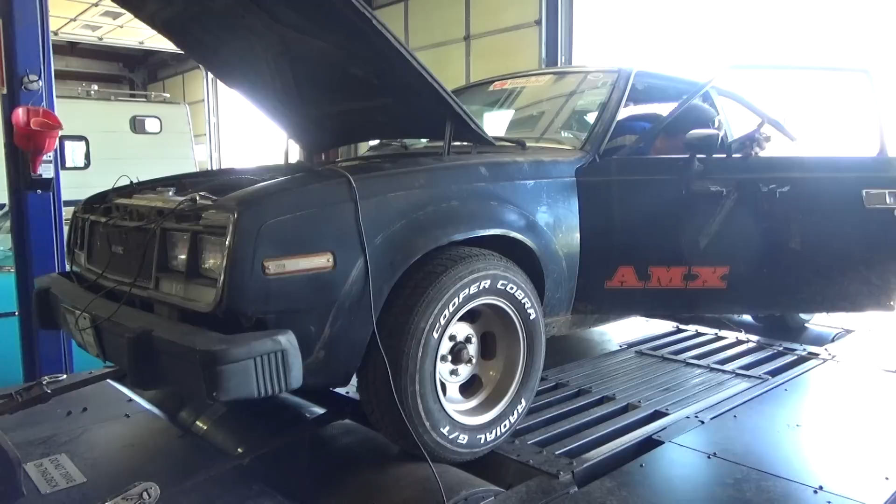Today I'm going to spend a little time on the dyno with the Austin's AMX. I want to make sure this carburetor is doing the best things it can do, and then we're going to pull this carburetor off and put a different system on it. That'll be another day. Right now I'm still trying to learn how to interpret the readings from the dyno.

Learned a lot on the Chevelle we worked on the other day, picked up an additional 40 horsepower, usable horsepower. Still got some work to probably pick up another 20 horsepower out of that with the 870 carb that's on it. But I'm not sure the customer even cares. That thing's got so much power and torque that he might actually be a little afraid of it, so he's probably going to have to get used to driving that thing now that it's making some real numbers. But it's making, what did we come up with, 370 wheel horsepower and 460 or 480 torque, something like that. Pretty respectable for an 870 carb with vacuum secondary. It really should be a mechanical secondary on that car because it's a stick shift, but it's what we had to work with, so we made it work.

That is his actual daily driver. That is his only car. So it's a good way to be retired if you ask me.

But today we're going to work on the AMX. I'm going to do a baseline pull just to see where it's at. We're going to check timing, and then, since this one is square jetted, we're going to try and go to a power valve. We'll see where it sits, make a power valve and jetting change, and see where we go from there.

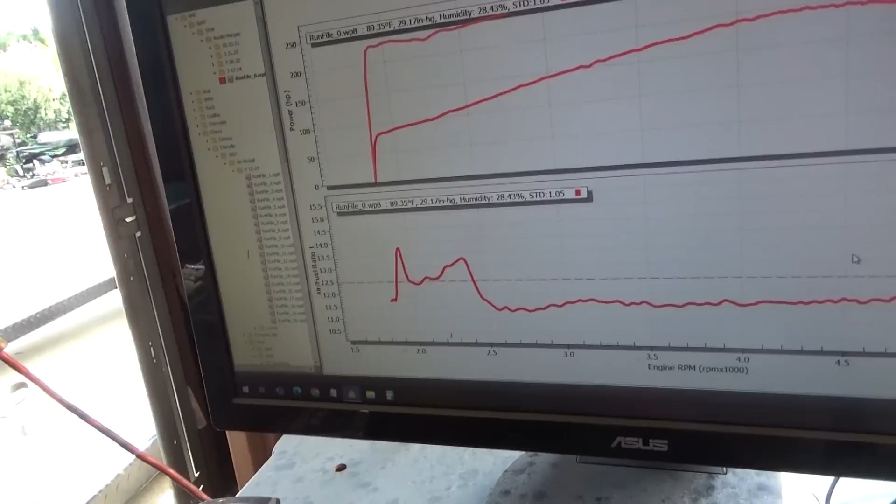Looks like we need to make a pump cam change and a squirter change. That should clean this up, and then we'll see what happens there. Looks like we're over jetted, so we're going to reduce our jets a little bit.

So we're going to make quite a few changes. I'm going to change my jets and do a power valve up front. I'm going to start with an 8.5. We'll see how that works, and see if this thing can make even better fuel efficiency with a power valve instead of being square jetted.

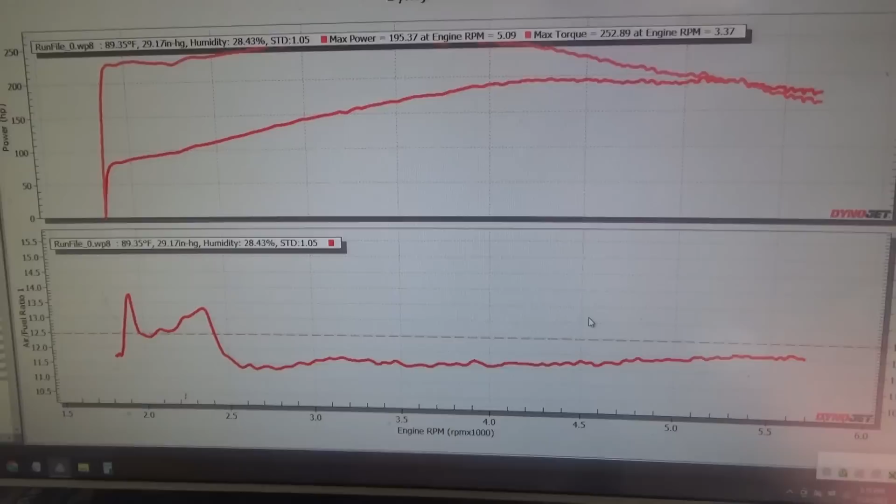It's already getting like 18 miles a gallon, which is pretty darn good. I'm going to guess we're going to get it into the low 20s once it's jetted correctly. But it's hard to keep your foot out of it when you're driving this thing around. So that's for pull number one.

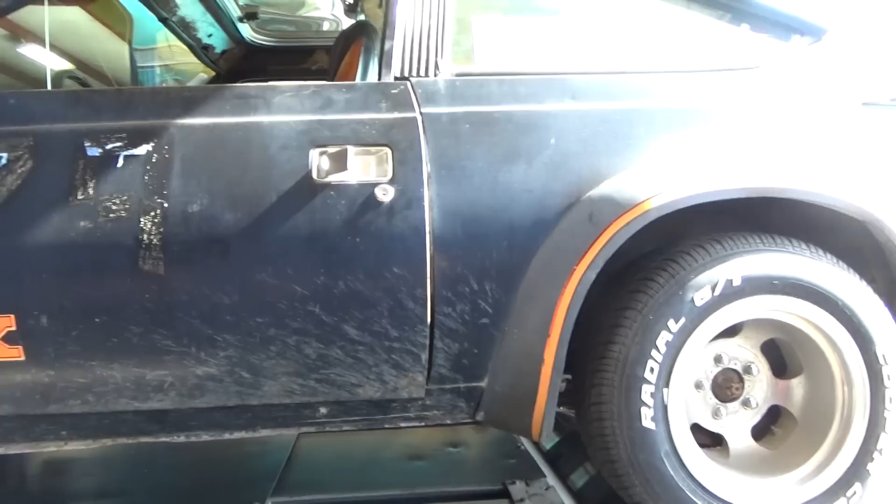Let's work on the pump cam, squirter, and... she might not be fast, but she sounds good. It may not be fast, but it's loud. Sounds fantastic. 195 at 5,000 RPM.

All right, pull number two. One change, no air cleaner. So we're just running an open carb. Let's see what that gains us.

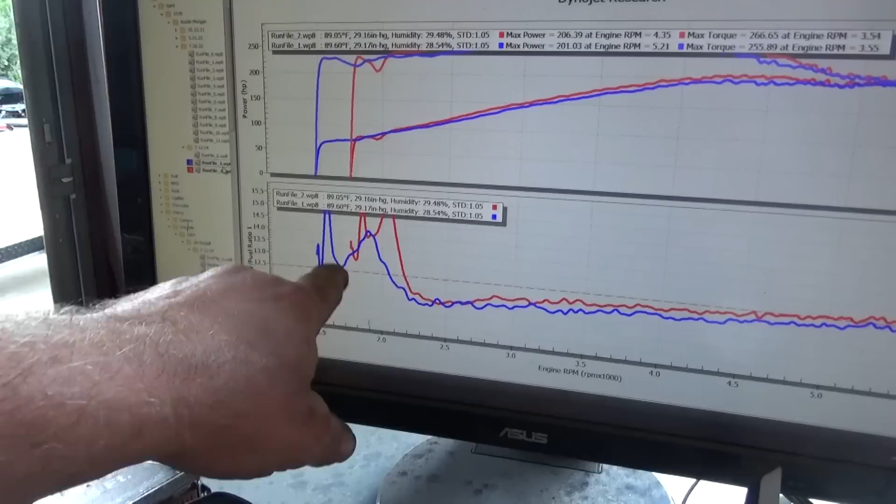Alright, so blue is my last run, red is my current run. So the blue pump cam gave us 5 horsepower and 11 foot-pounds of torque. Well, I would say that's a good improvement. My graph I'm still not liking, but we'll work on that yet. I might reduce the pump shot to see if that makes a change.

Alright, well, I'm going to go ahead and remove the carburetor, make my jet and power valve change. And this is actually a carb cheater, which we're going to remove from this car. We'll probably use it in something else. That's a pretty cool interface device built by Thunderhead289 on his channel. He talks about them quite a bit.

I think Austin did an install video on it. It's basically a controlled vacuum leak that has a Wi-Fi connection, and it lets you know exactly what's going on in your engine while you're driving down the road. It's pretty cool. But we're going to pull it off this car because this guy needs some different jetting, just because I want to make it better, or as good as I can make it. And then ultimately, this engine's going to be coming out of this car, but I wanted to make sure I had it tuned as good as I could get it with this carb, because this carb's going to probably stay with this engine in the future. So let me get the carb off there, and we'll get some of this other stuff out of the way, and we'll make some changes.

Well, Austin thought this was a square jet, but it's got a power valve in it, so let's get that off of there. Looks like we got a little dryer out there. Put a new vacuum cap on that guy, he's not doing much of anything. Looks like that guy's getting ready to go too, so we might as well replace him while we're in there.

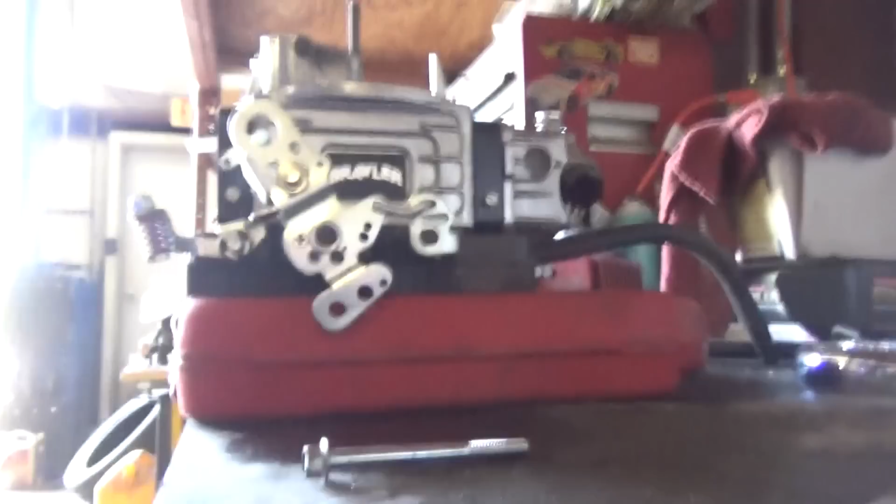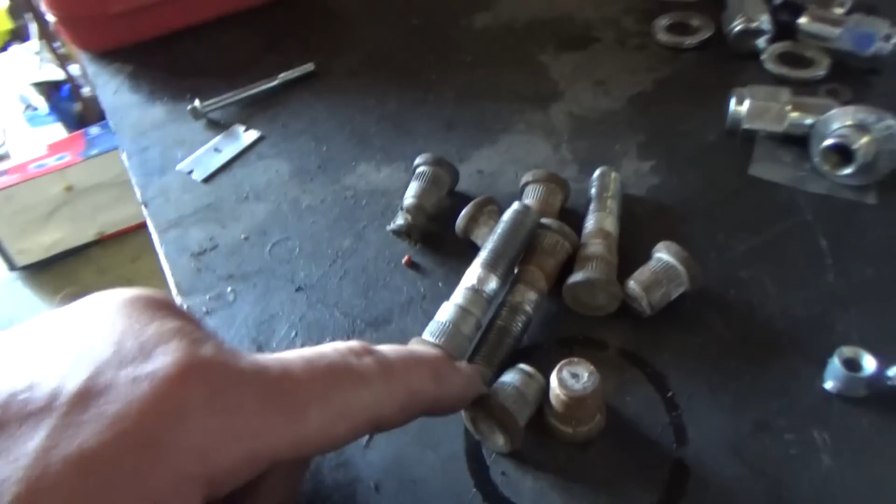Take our carb cheater spacer off of there, which is a controlled vacuum leak. Oh yeah, don't leave your lug nuts loose on your Dodge trucks. These are $16.79 a piece. Holy cow, Mopar.

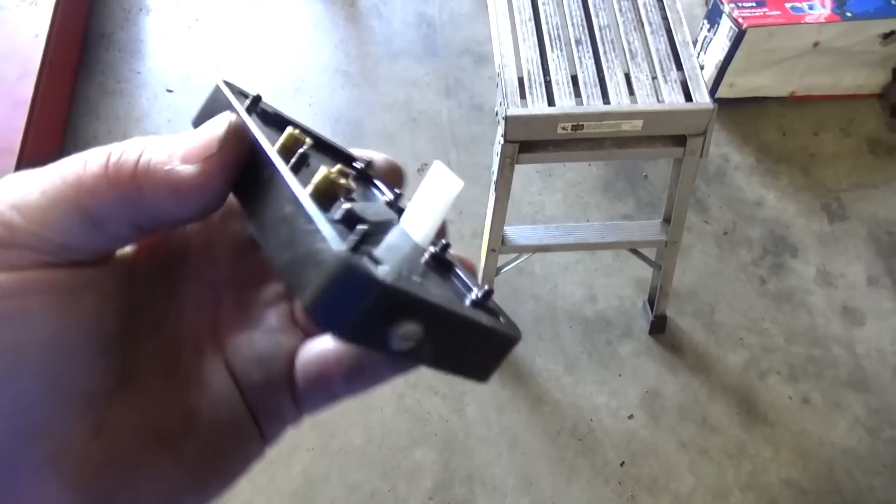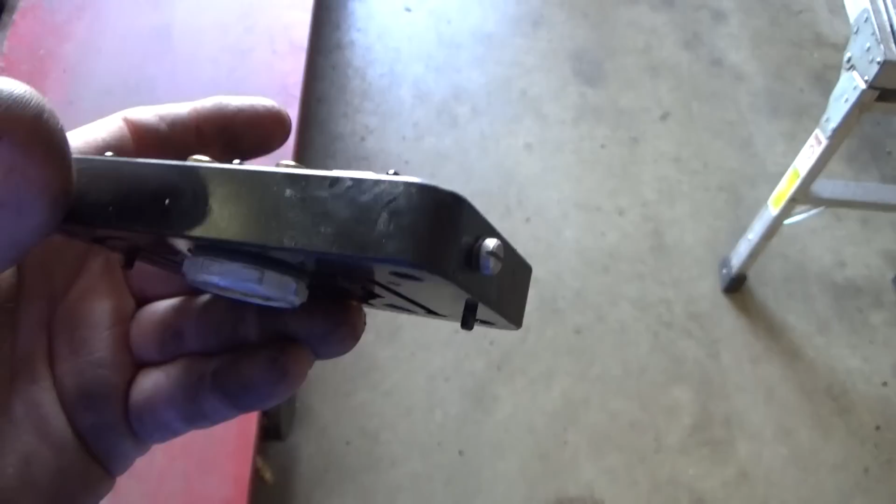So we have a 6.5 power valve. We're going to change from a 6.5 to an 8.5 and see if we get a little better enrichment sooner. What are our jet sizes? Alright, so we have 69 main jets and a 6.5 power valve. We're going to switch our power valve to an 8.5 because this car pulls 17-18 inches of vacuum cruising steady down the road in fourth gear.

So we're going to try an 8.5 to get that enrichment a little bit sooner. Hopefully that'll clean up our tip in. I'm going to leave the jets the same because at the top side it's running at a decent amount, so we'll stick with the 69 main jets. 69 is always a fun number. We'll stick with that.

I decided, I have it off the car, might as well check the back side. We have 74 mains in the back, and it's a block plate, so it's just running straight jets on the back. I'm going to put this thing back together. I didn't find any trash or debris inside the float bowls, so we're looking pretty good. I think I'm going to replace that gasket, it's looking a little decrepit. Might as well do this one on the plate too, since I'm in here.

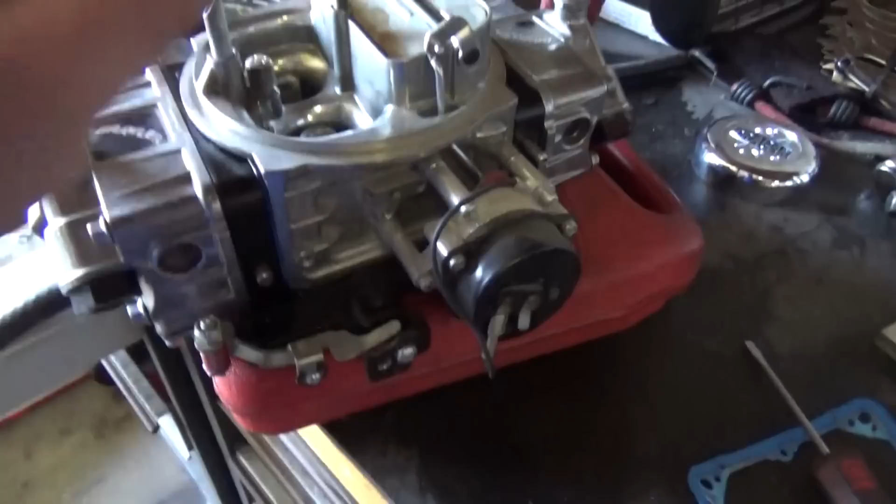My back end's all put back together with new gaskets. You can see it was pretty bad, probably over tightened a time or two, but that one's all sealed up. My pump diaphragm is acting good, it doesn't show any signs of having any problems. So I'll get my blue cam in the back side, my blue cam on the front side. We'll put this thing back down with a spacer.

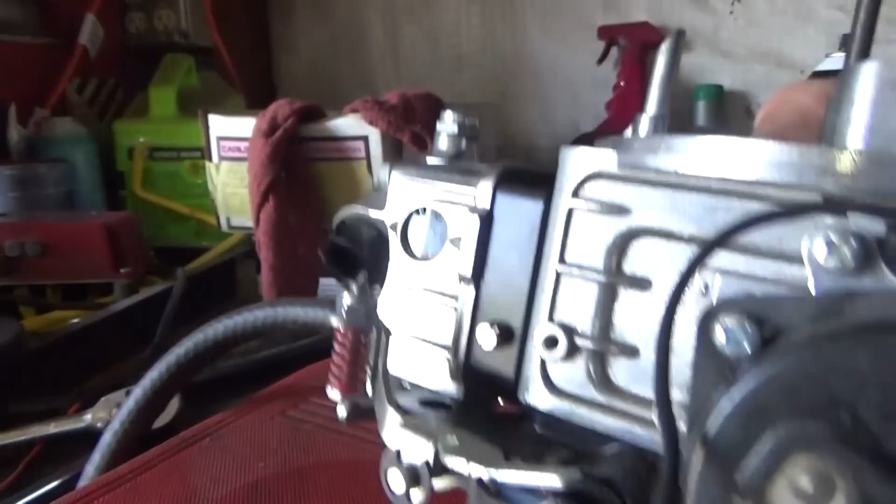Make a pull. So the blue pump cam actually is too big for the rear circuit. When it goes full wide open, I don't know how I can do this.

It's actually binding the pump. So we're not going to use a blue cam in that, that'll be bad for business. Interesting little factoid with this setup: the blue cam, the green cam, and the orange cam in the secondaries all bottom out the pump. We don't want to bottom out our pump.

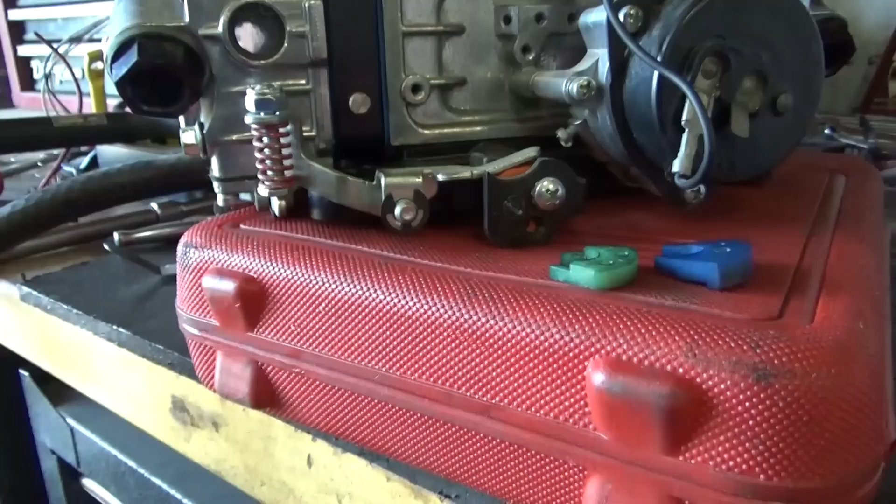We want to have at full wide open throttle, we want to be able to put a 15 thou shim in there, a feeler gauge, when it's at full extension, and none of these three allow that. So we may be sticking to the pink in the backside. We'll see. Even the pink cam binds the pump.

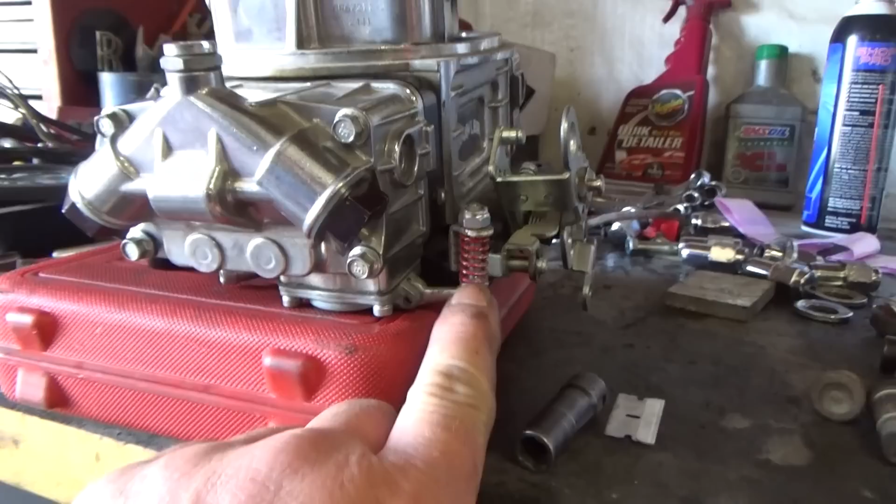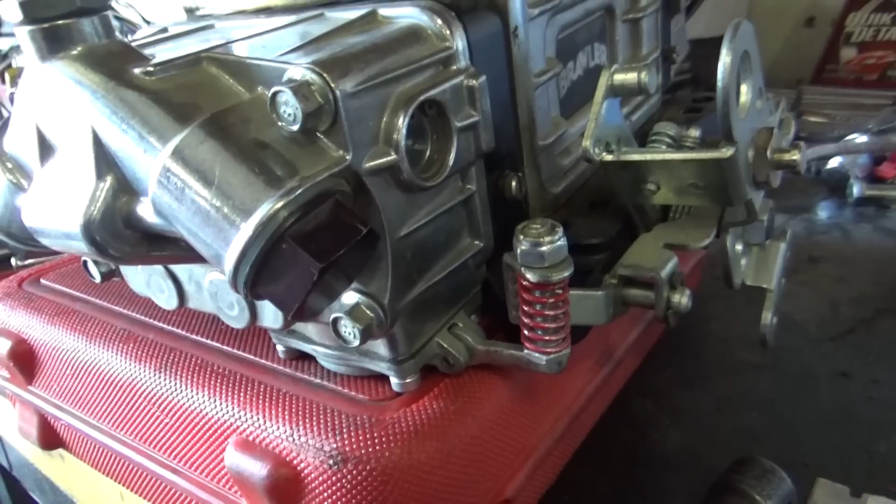That's weird. Well, I guess we're going to stick with the pink cam in the secondaries for now, and we'll figure out pump cam stuff later on that. Yeah, that's kind of awkward, because you're supposed to have a clearance here at full extension. We'll figure that out later. I've heard of people bending these arms to get better adjustment, but I wouldn't think you should have to do that. But I don't know. I don't know a lot, and that's okay. I'm learning as I go. Oh yeah, I'm a dummy.

You shorten this guy up, that'll change your depth and allow you to clearance that for the bigger cam. So let's put our blue cam back here. We'll adjust our linkage spring bolt so that we have clearance at full extension. That way we won't have our bind and we'll have more fuel pump. So let's go back to a blue cam instead of me fiddle farting around with stuff, because I'm still learning.

Alright, so I have my blue cam in position 1 on my secondaries, and I'm going to tighten up my linkage adjuster, and we'll see where that ends up being. It's going to be, you can see it's actually loose right now. Let's tighten that guy up.

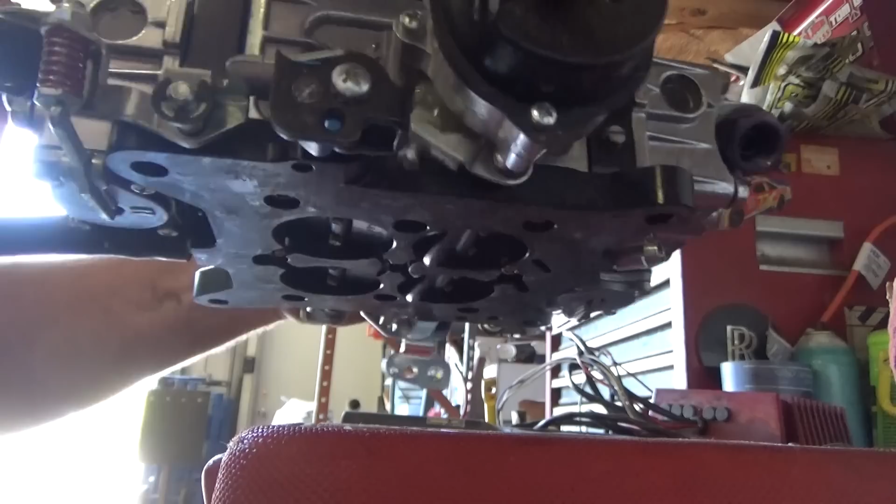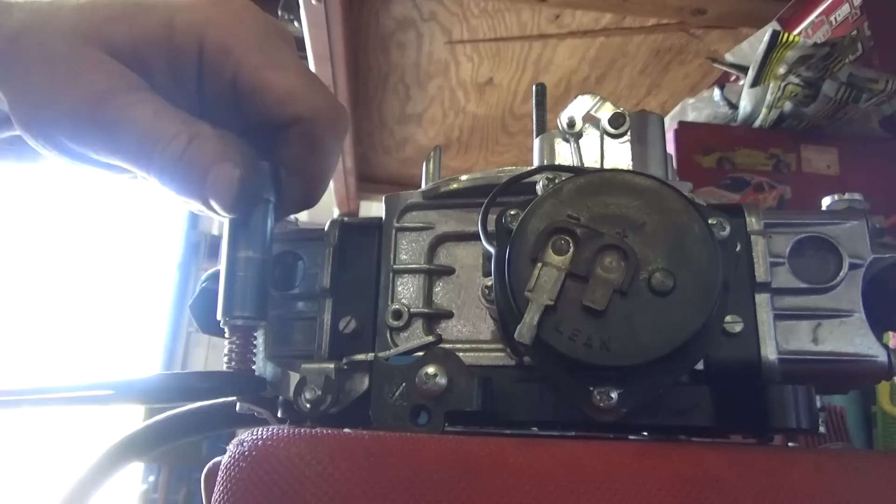Still too tight, I think. Yep. Tighten that guy up a little more. Better. There we go. Now we're not binding. Good deal.

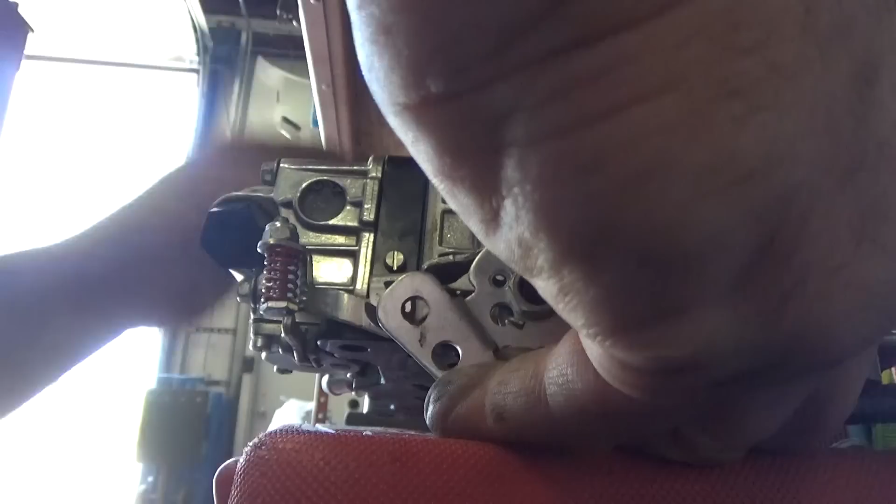So I'm expecting to see an improvement with fuel rate at the tip-in area and the early RPM stuff. I raised my power valve. Let's put this thing back on the car and see what it does. Made some good improvements. I finally understand the adjustment process on the linkages, because at full open throttle you want to have 15 thousandths shim be able to pass through there so you're not bottomed out, because it creates binding on the linkages, and it can cause accelerated wear to different bits. So let's put this thing back on. I've got blue cams front and rear. And everything looks to be good.

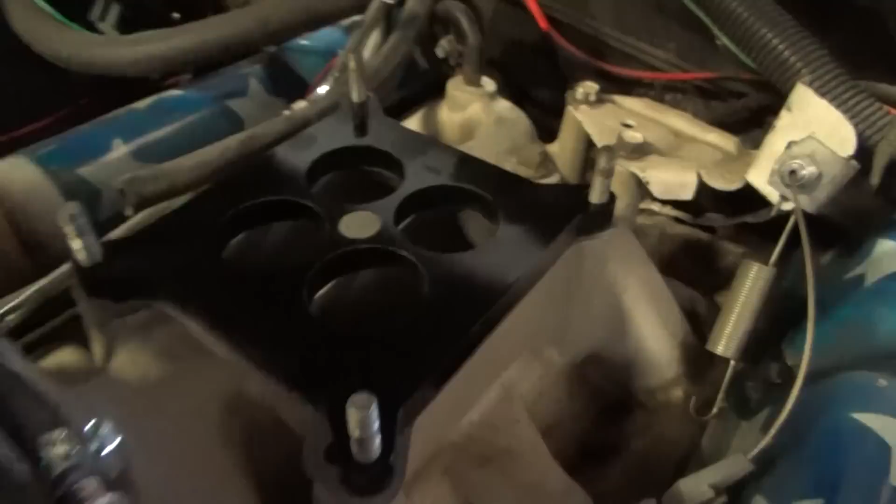Alright, so we're going to use a Jegs phenolic carburetor spacer. This one's a 4-hole, just like the Carb Cheater one that we had on here. Comes with bolts, 2 gaskets, hardware, pretty nice little kit. The gaskets fit well. Get rid of this old one, in a box, and we'll save those for later. Drop a carb back down, hook everything up. I gotta go find some vacuum caps, and we should be in business.

Turn my idle speed down here. That'll work. I think a better built system's in this car's near future. Except those are expensive. Sounds pretty good, I like it.

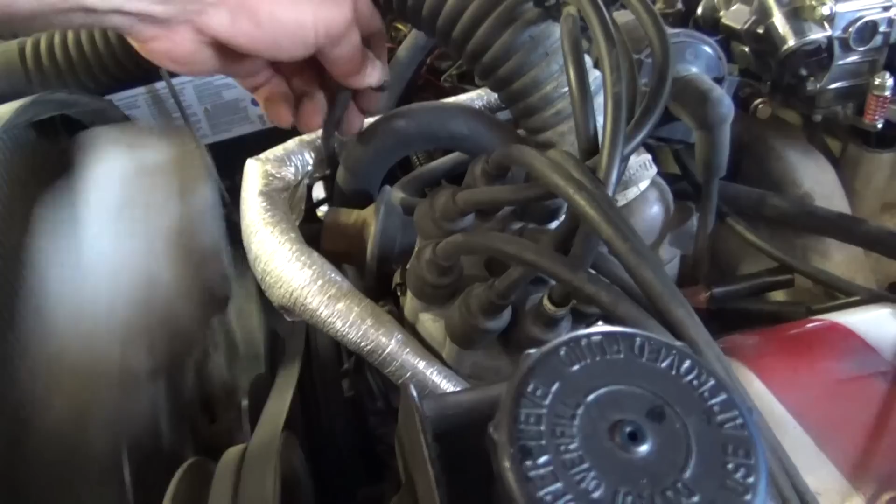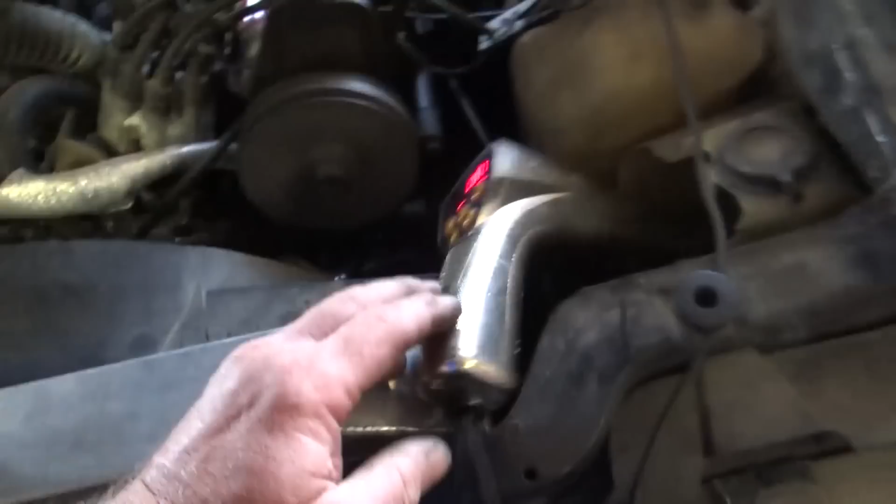Let's plug up my vacuum, see where our timing is since that's disconnected. Looks like we are a little lazy. We need to give it some more timing. So let's make a pull with the timing where it's at, and then we'll make a pull with the timing advanced another probably 8 degrees to get it where it needs to be.

Man, that sounds good. All right, what do we got?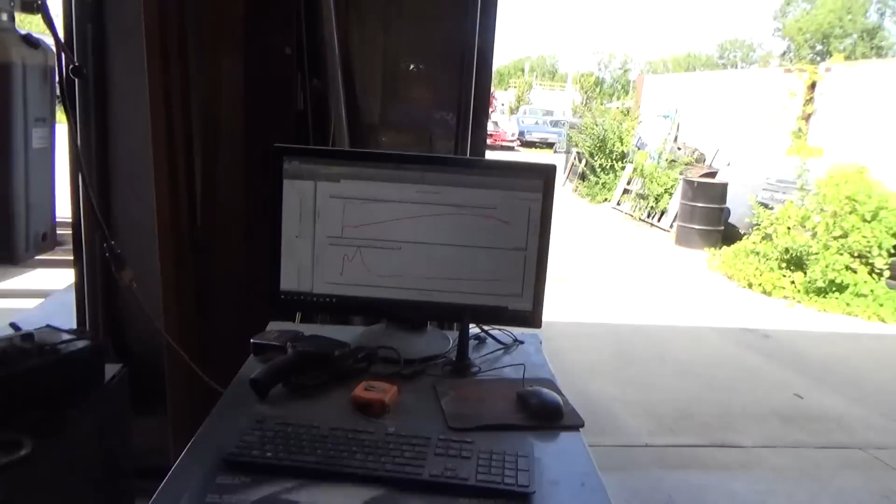210 at 4,490, and 269 torque at 3,180 RPM. Well, that's pretty cool.

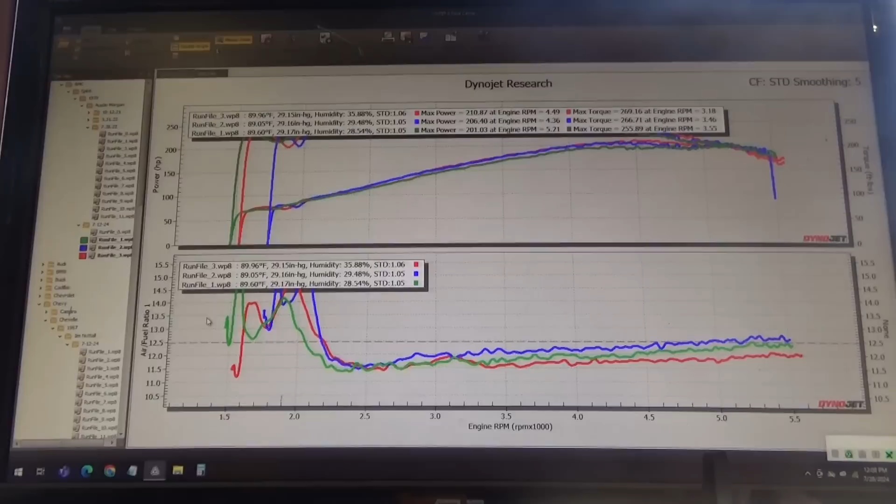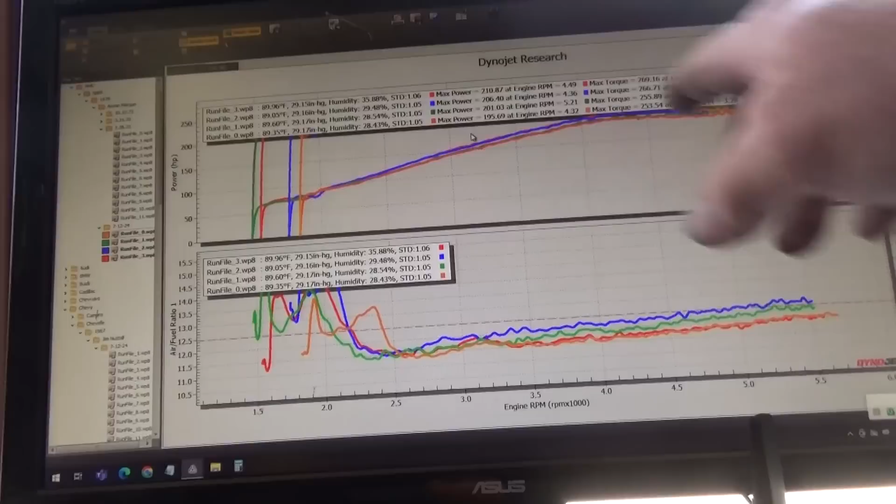We've made almost a 5 horsepower improvement each run on the last 4 runs. That's pretty awesome. 195, 201, 206, 210 at the wheels. I'm pretty happy with that.

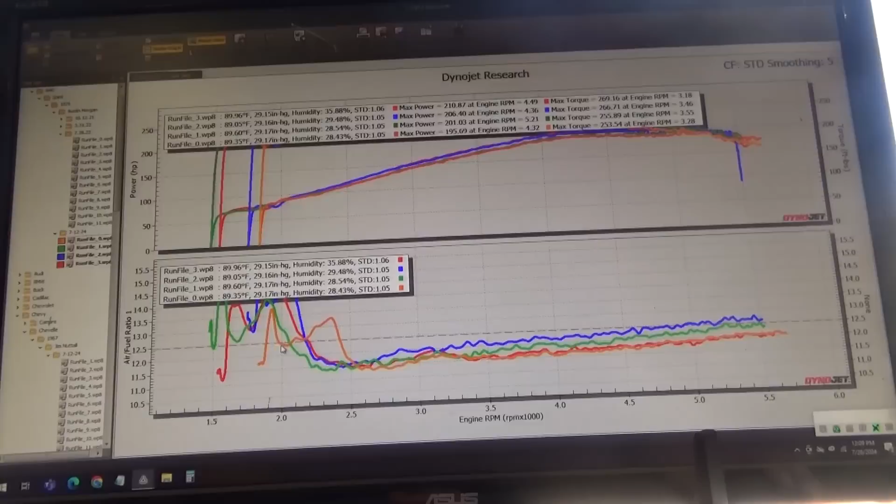So I'm actually going rich now initially, and then it leans out, and then probably the secondaries are going in and leaning out. So let's reduce our shooters and see what kind of a change that makes. But yeah, it's a good change, nice linear power too.

Alright, I'm going to make another pull real quick. I adjusted my shooter size down. It was a 32 in the rear, I went down to a 28. And it was a 31 in the front, which I also went down to a 28. We'll see if that makes any changes.

I want to see that high-low kind of come closer together, and I think that's where it's going to come into play. I mean, we're not doing bad. 210 to the wheels on a 307, that's pretty respectable. That's got to be, what, probably 250, 260 at the crank, somewhere around there.

I don't know, maybe more than that. I don't know what the driveline loss is on this car. I would say 20% is probably a good guess. Let's fire it up and see if we made it better or worse.

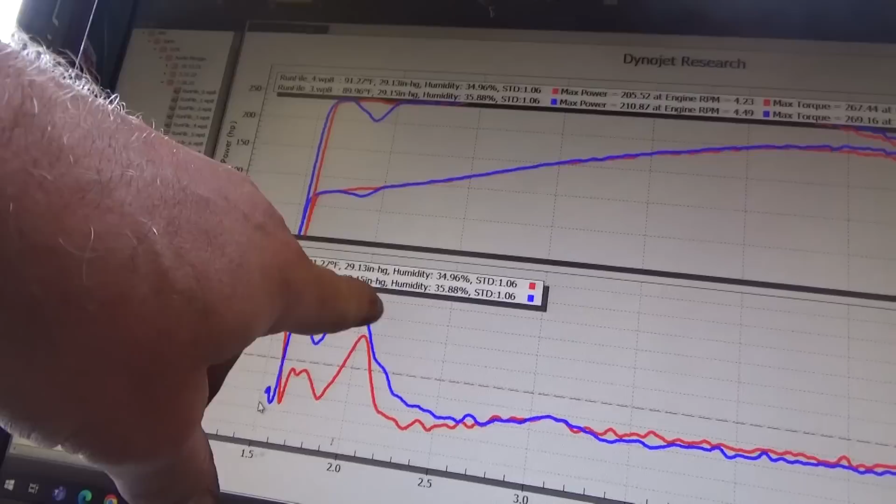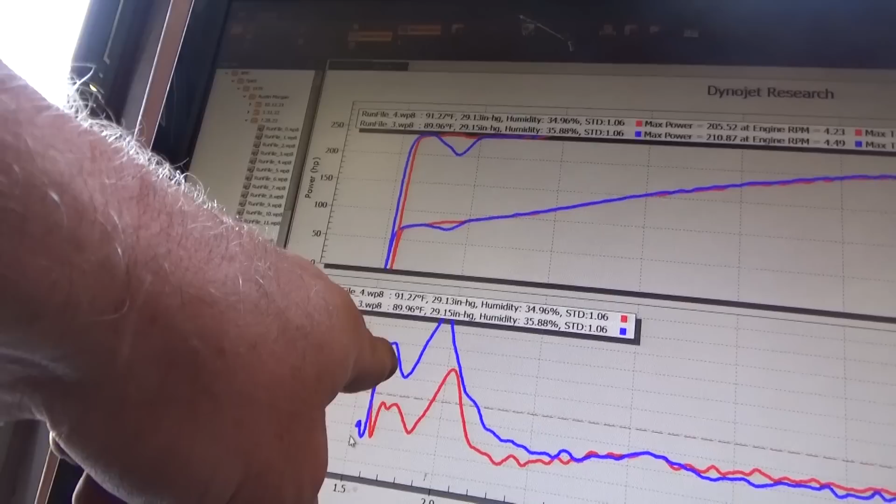I haven't quite figured out what part of the circuitry is doing that. That might be the secondary pump shot, because I moved them both smaller, which brought me more rich, both in the initial tip-in and then the secondary tip-in, which is what I'm guessing that is.

And then we go down pretty fat, and then we end up, so we could probably take some jet out of this now that we're coming into it where we need to be, and taking jet out of it will raise our horsepower across the band. So I may go one jet size smaller on the primaries and see what that does.

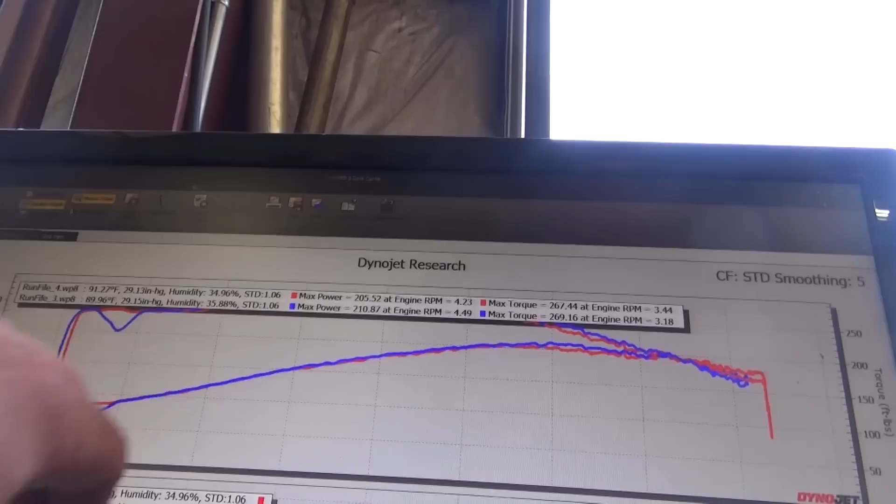Looking pretty good. We only lost 2 foot-pounds of torque, but we lost 5 horsepower. But we're in a much safer range, only getting up to 13.5, so that would be safe for streeting.

But we'll definitely take some jet out of it. Or do you take the jet out of the secondaries? That's a question. I suppose I could just run it on the primaries.

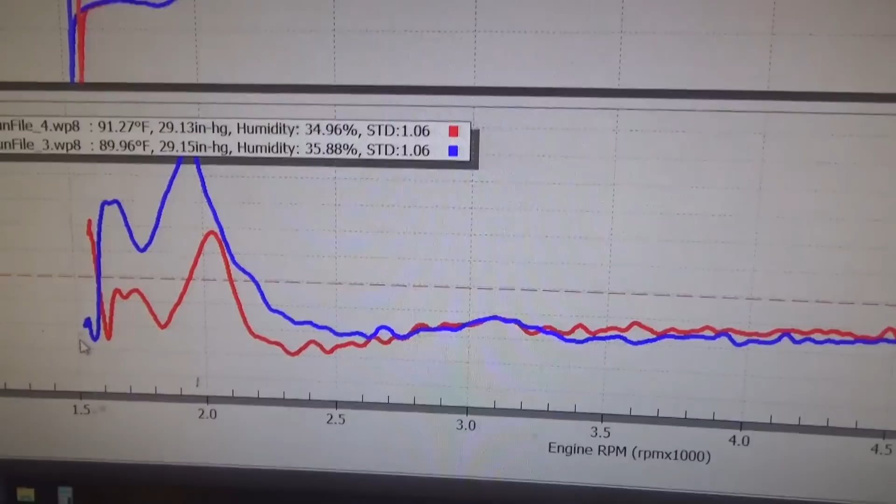This is a progressive mechanical secondary. I don't know how I'd do that. Disconnect the linkage and hold the primaries shut, tune the primaries till they're where I want them, and then add the secondaries to it. That's probably how you want to do that.

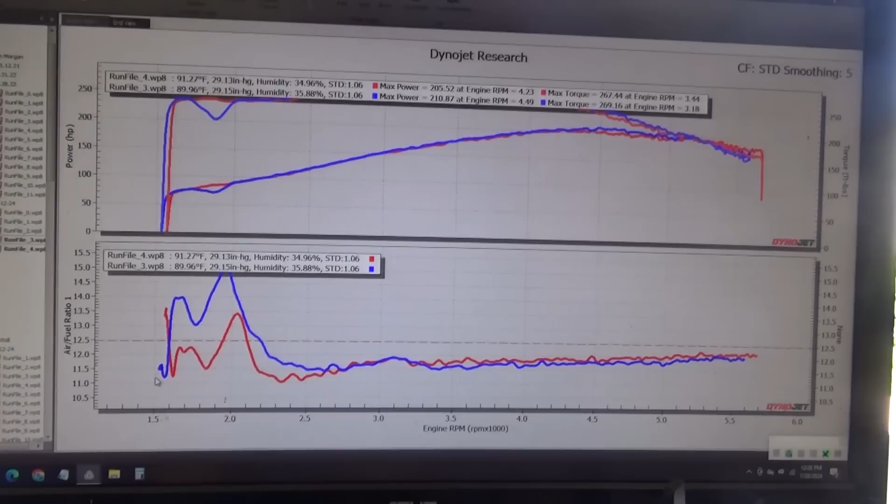But we're making improvements, I like it. So, secondary shooter change on the secondaries only, from a 28 to a 25. Make that shot last longer. Hopefully it'll take some of that second peak out, and that'll verify that that second peak is the secondary transition.

All the way across the board, I'm pretty happy with it. After that, I'm going to add some timing back into it. Let's make this run with the secondary shooter change.

And it did drop that secondary spot, so the shooter change was beneficial. Lost power again, but we're running fatter all the way across the board, so we need to take some jet out of it. I'm going to drop the mains one tick, see what that gains us. We're probably going to go down 2 on the secondaries.

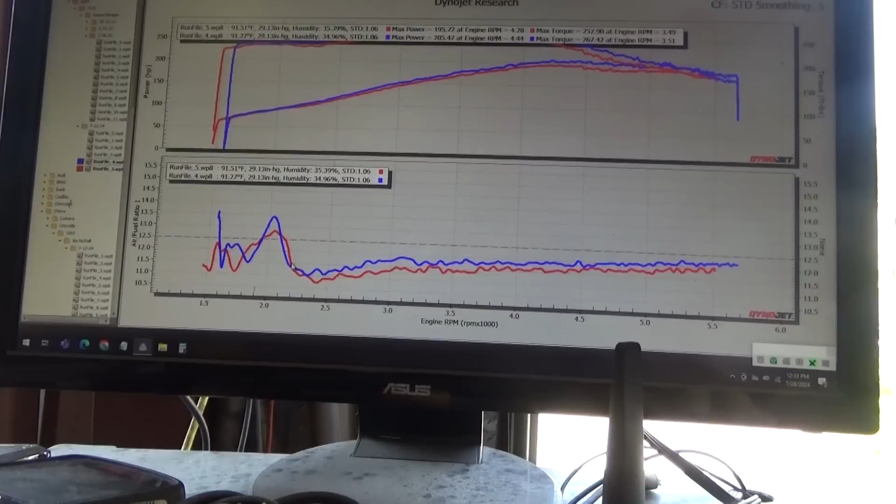You can see the change, only changing the pump shooter made. That graph's basically the same, but then the peak, the secondary peak is less. So, pretty good. Let me add some timing into it, because our timing is not really great.

Alright, we increased our timing. It was pretty lazy, so I just added probably 8 degrees of timing to it. So we should see a nice gain from that.

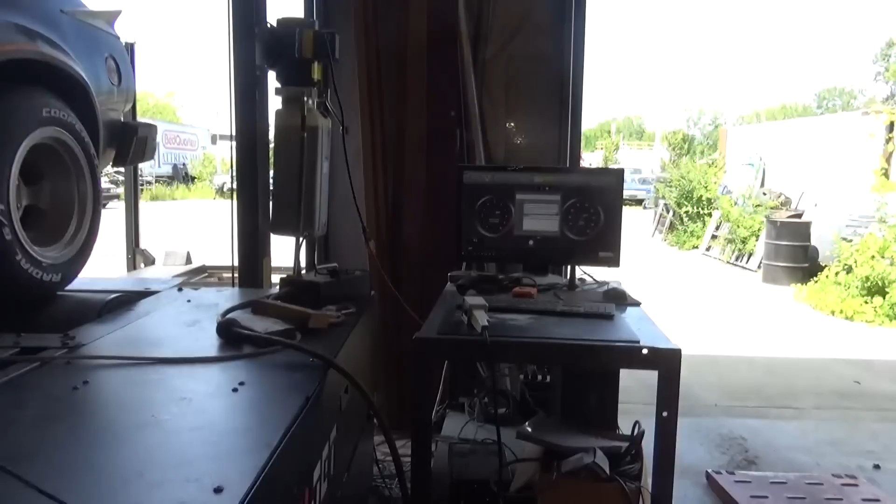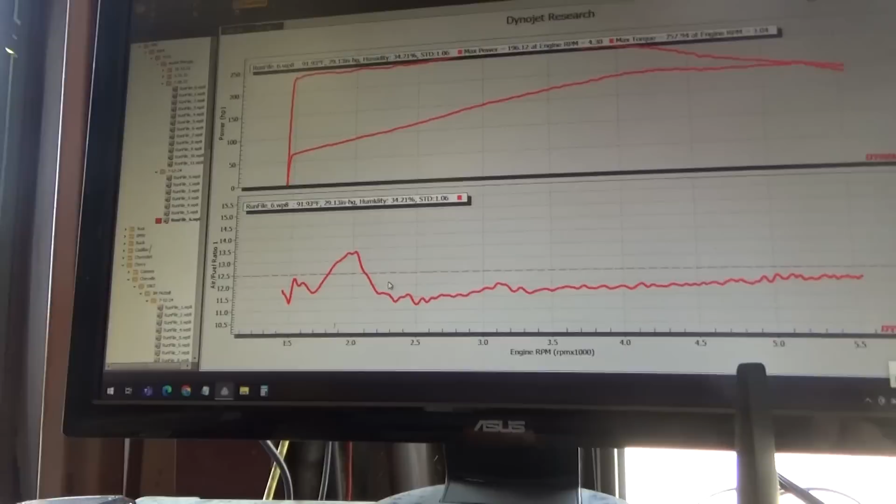Save. Oh, lost more power. It's also getting hotter. 196. What'd you do, Richard? We'll take some main out of it. You made it worse. But I also made it safer. Let's see.

That's pretty. We can definitely bring that up quite a bit with a jet change. So that'll be next. I'm gonna let this car cool down. I'll probably pull the carb off again to do the jets on the front. It's kind of tight in there on this car. Nothing's dripping out the bottom. That's pretty good for an AMX, or any AMC for that matter.

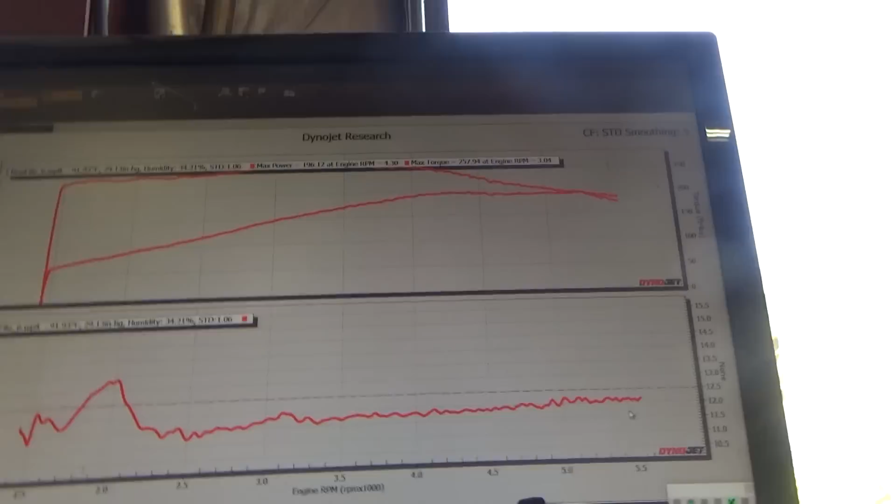Well, I've made headway. The last 3 changes I made actually reduced my overall horsepower. But my torque stayed pretty close. So I dropped from 269.16 torque at 3180 to 258 at 3060. I went down from 210 at 4490 to 196 at 4300.

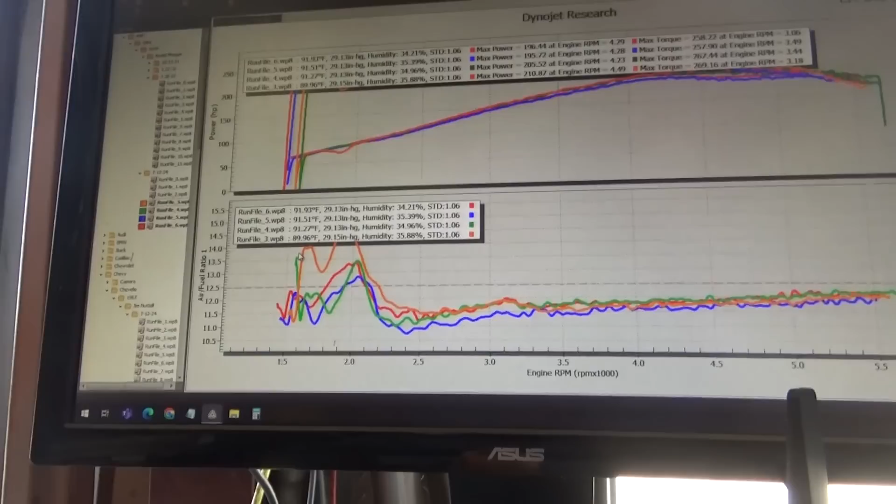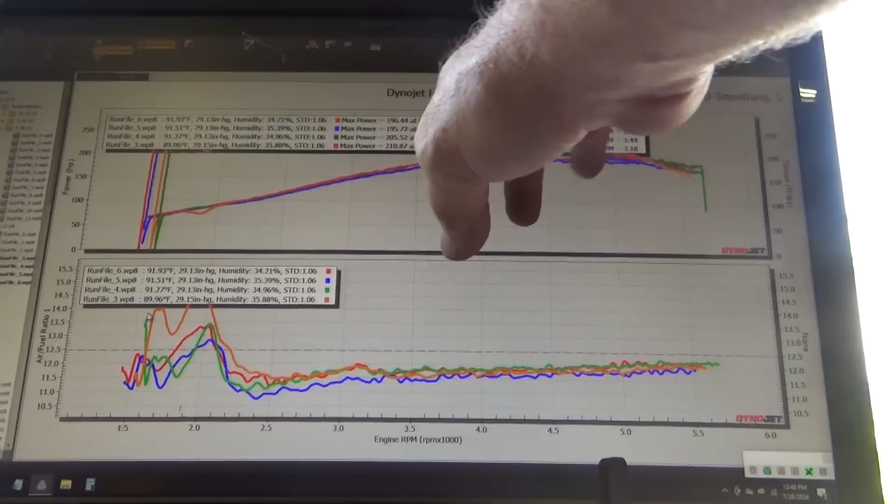But you can see I'm way better in my tip ins, and this is so subtle I don't think it's anything to worry about. So now I'll focus on my mains, bring those down a little bit to lean it out, and we should see the horsepower and torque probably rise a bit because it'll be running cleaner, especially in this spot. So that'll be next. We may try some different pump cams too, but the blue one's working pretty good.

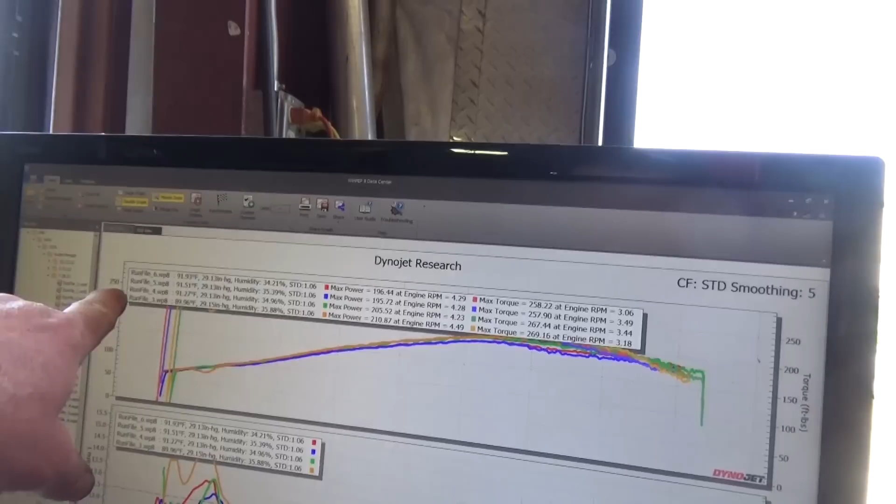Well, like I said, I'm going to let this thing cool down. I'll pull the carb off. I'm going to go down 2 jet sizes in the front, and then we'll fire it up and see what it does. We might take some of that timing back out of it too, because it lost quite a bit with that advance. So, like 5 horsepower. Oh no. Actually, the timing advance gained us a horsepower and a foot-pound of torque. So it basically didn't do anything.

Alright, well, I messed around with some other stuff in the shop while this thing cooled down. I dropped the primary main jets from 69s to 67s. It should bring our AFRs up across the board. And we'll see where that is. This will be the last pull for today, probably the last pull for this video.

I have to take the O2 sensor out of the exhaust, and then the rest of the carb cheater can be put in a box for its next destination. I'm not sure what that's going to be. And then I'll pull this thing off the rack and move it down the line. I actually might get my Buick down here and play with it a little bit on the dyno. It's got some room for improvement on it as well. So let's get this thing up to temperature, get the carb bowls filled up with fuel, make a pull.

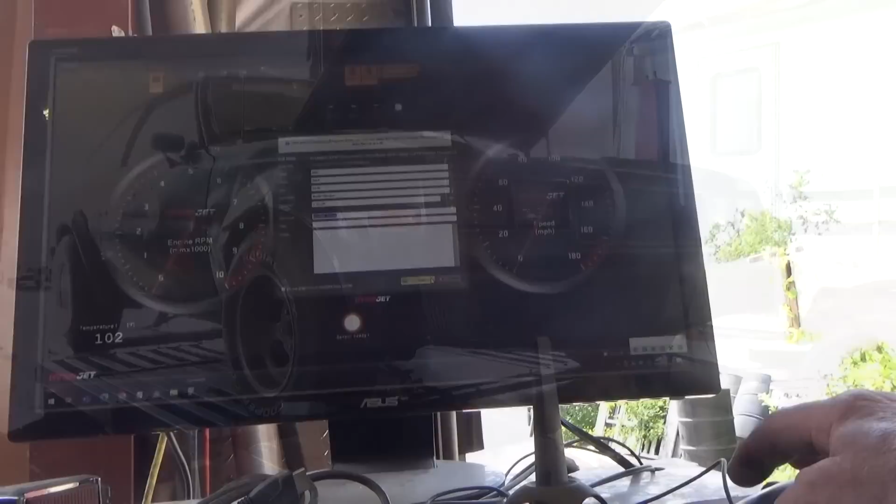Save. Ooh, that's a lot more lean. That was a huge lean pop, yep. Lean stumble. Wow, that was up to 16 to 1. And we get down to, we're still below 12.5 for the second half of it. So maybe go up one jet.

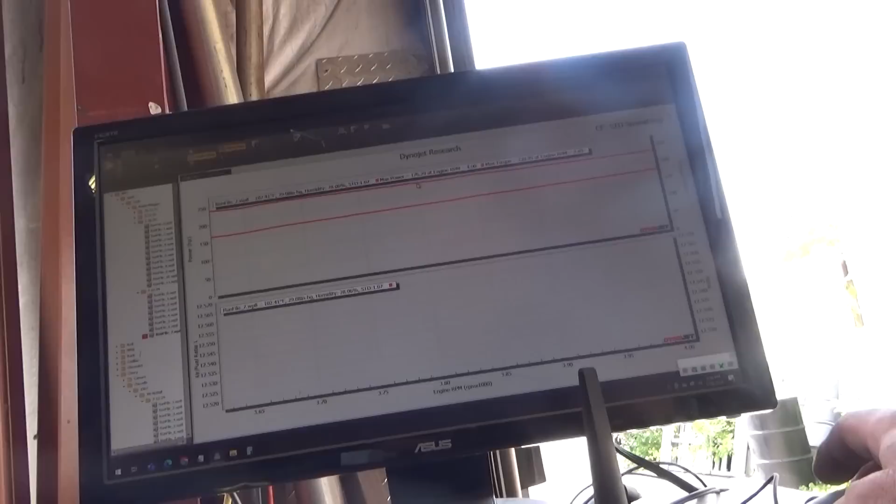Oh, I lost a ton of power. 176 and 238, so I'm definitely going to put more jet back into it. Let's make another pull just to compare the same to the same. What did I do? Oh my goodness. Let's make another pull just to compare apples to apples.

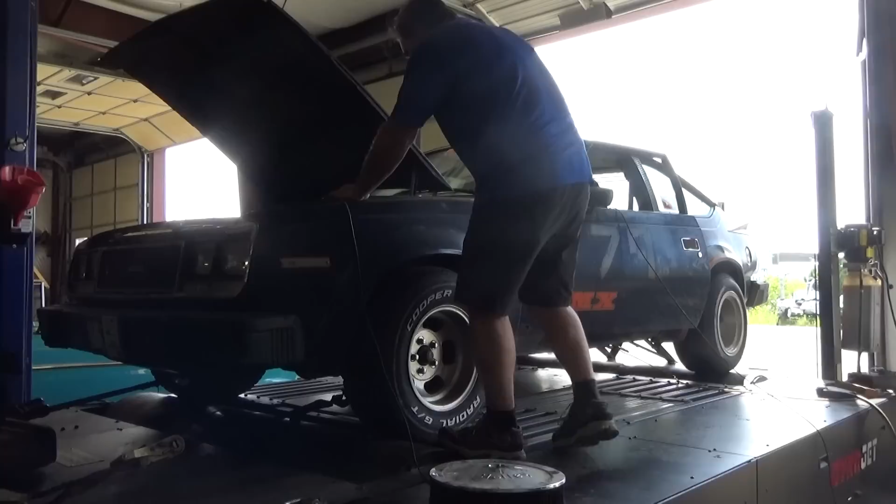Secondaries are definitely not opening all the way. Ouch! That explains a lot. His throttle cable's turned into a slinky. Need a solid casing sleeve. The casing of the throttle cable is collapsing on itself, so now we have slack in the throttle. So I'll find a new sleeve, ouch, hot, a new sleeve for the throttle cable, but that's not going to happen today. So to be continued, I guess.

I'm going to fix the throttle cable. I'm just going to make a new casing for my throttle cable. This stuff is actually a steel core with a thicker cable, and you can see the old one got all heat disfigured, and so the casing was actually shrinking and not allowing the carburetor to open.

So hopefully we'll see a substantial change in our output now that we have proper full opening of our throttle cable and our throttle actuator. So without further ado, let's warm this thing up and see what it does. Float level needs to come up a hair.

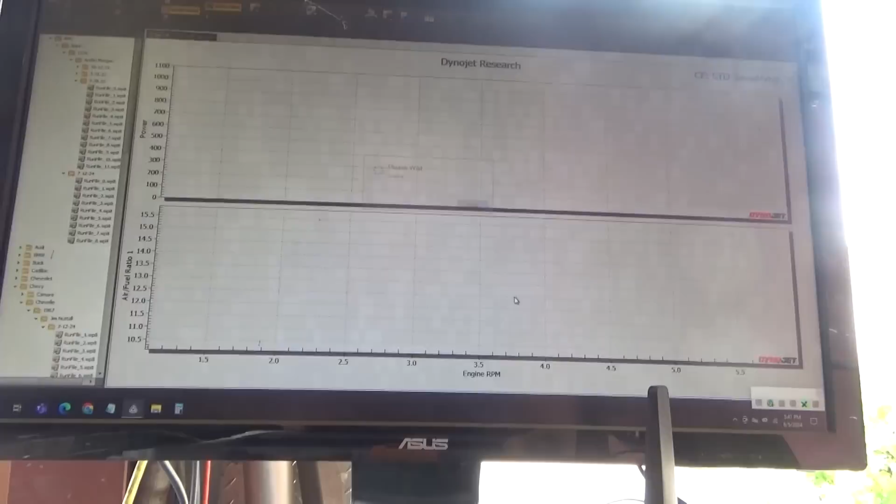Little lean tip in. So I need more pump shot. 224.47 at 4,600. 281.87 torque at 3,400. Well, it works a lot better when the carburetor's opening all the way, doesn't it?

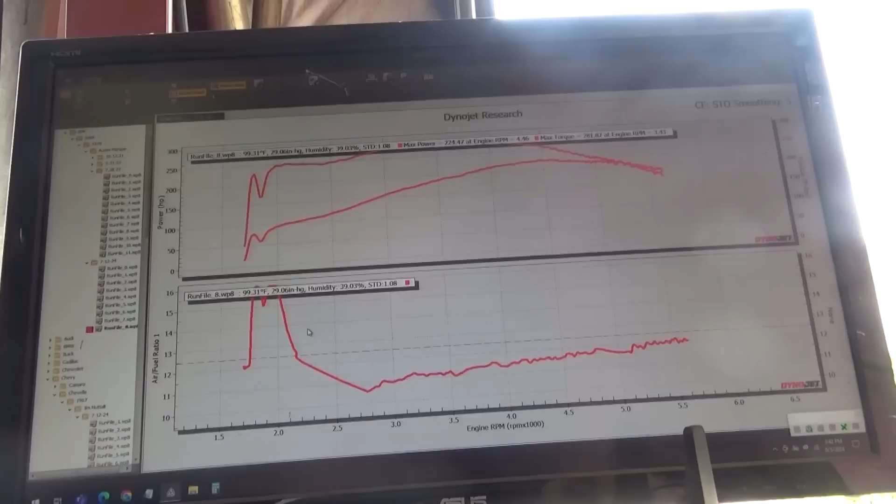That guy there. So when I tip in, I need more fuel. So I'm going to go to a bigger pump shot and see what that does for us. A bigger shooter, so I want more fuel faster. I think my pump cam is probably okay, but we'll play with it a little bit.

Alright, so I took my shooters back up to 32s. I had some really small ones in there, and that should bring those initial peaks down more rich. And we'll see where we're at, and then we'll make some changes from there. Now that I've overcome the mystery power loss that was my throttle cable shrinking and my carburetor wasn't opening up enough, now I have that problem solved and we have maximum throttle engagement.

224 wheel is pretty impressive out of a mildly built 304. It's not a high compression engine. It wasn't a super expensive build. Pretty happy with the numbers, and honestly, if I get the lean stumble worked out of it, that's probably as far as we're going to go with this, because we have a plan to go a different direction with this.

But I wanted to get the carburetor as close as possible, because it's going to be essentially a backup carburetor for when this thing's out running around. It will have the carburetor in the trunk with the things to hook it into in case the other system happens to decide not to work, just as a safety backup to be able to not have to worry about being broken down. Which is why we're doing the tuning. But we're also showing you what it takes to tune these carburetors.

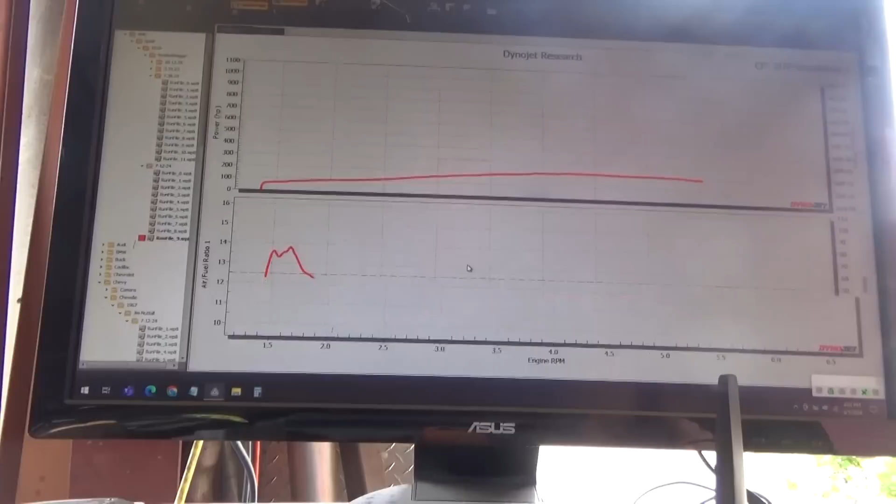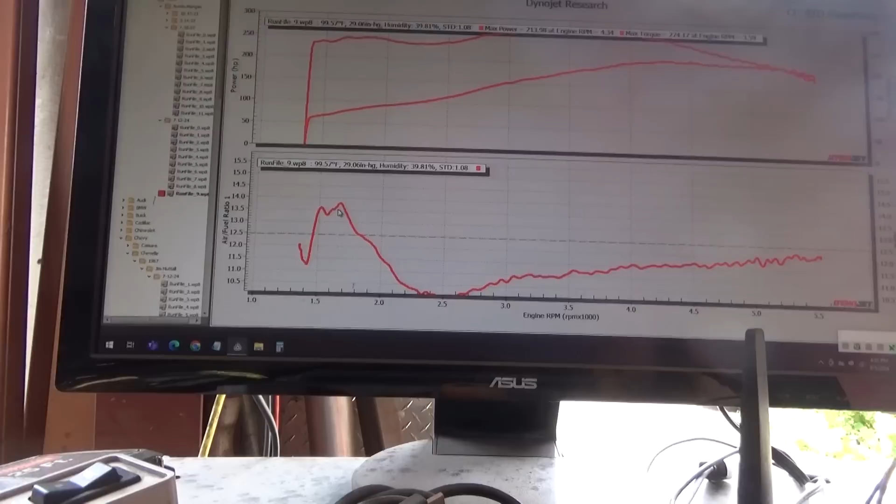Oh, that came down a lot. But it ends up pig rich, doesn't it? Maybe too much pump cam. Maybe go back to a pink pump cam. We could probably go to a bigger shooter, which would deliver more fuel sooner, so that we're getting it sooner instead of later. Let's go to a 35 if I have one on the shooter, because that made an admirable change.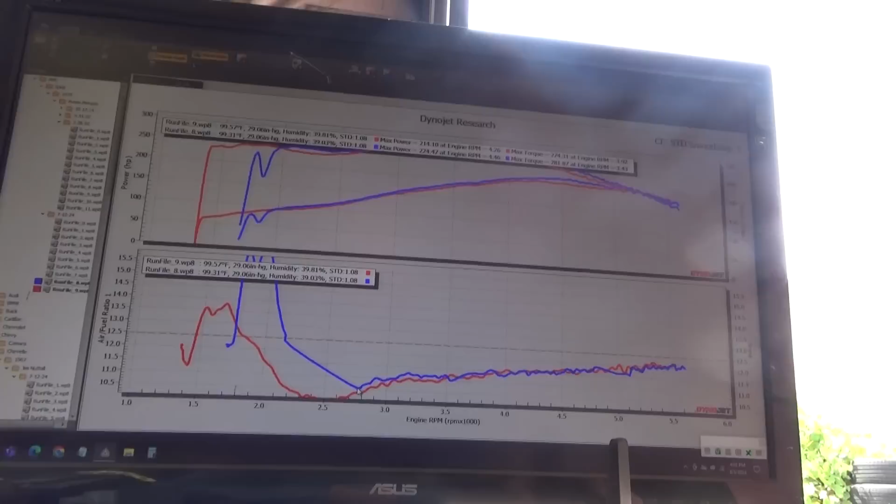Our max power went down to 213.98. Torque went down to 274.17. But it's not running near as lean on that stumble tip in. Still goes pretty fat. I gotta clean that up a little bit more. Let's see what we can.

I went from a blue cam to a green cam. I'm gonna try that. I'm only gonna run to like 3,000 RPM. Just want to see what the difference in the graph is, so that I understand which part of the graph I'm moving for better AFR. And we'll see what it does.

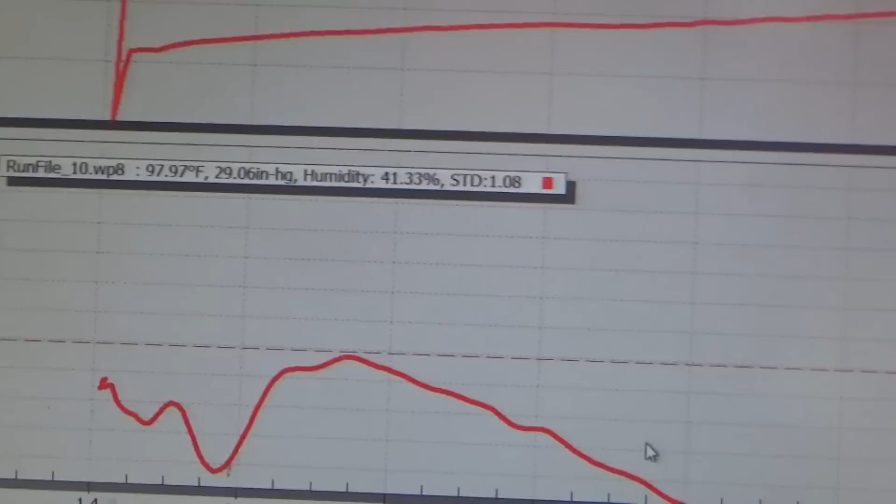I'm gonna leave it with 32 shooters in the front and rear, because I was actually getting initial rich and lean, so see if the green cam in the front makes a positive or negative change. And our throttle's opening all the way down too, so that's a bonus. Well, that green cam brought us down a lot better.

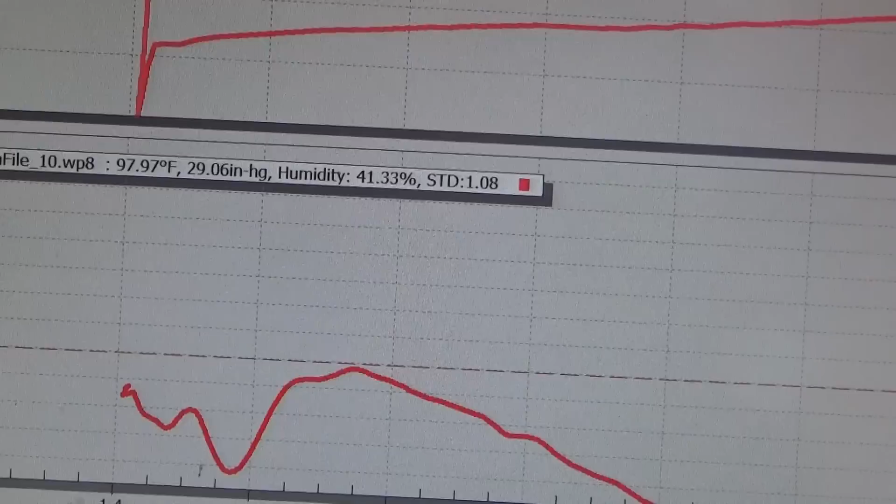I guess we need to do a full pull and see what we look like across the board. So this blue line was a blue cam, this is a green cam. So the primary is better, the secondary is pretty much the same. Let's put a green cam in the secondary as well.

And then we'll probably need to remove some shooter out of it. Let's go green cam on the secondary. And this is splitting hairs here too, guys. Like, this is completely drivable the way it is.

Alright, so I changed my secondary pump cam to green cam. Let's see if that makes our graph lower on that second. It should. And then I'll probably take a little shooter out of both of them. I think it'll be probably as good as it's going to get. It looks like I might be able to pull some more jet out of the front with the power valve working as it does. So we might try that last, but let's just see what it does.

That's what we're doing here, is just trying different things to see what it does and see how it moves our graph around so that I can better understand what I'm reading when I'm reading the graphs coming off of this dyno. Pretty cool stuff. I've learned a lot. Hopefully you guys have learned a lot with it as well. And I'm going to make another pull.

Let's see what we see. Hey, look at that. So, 214, 271. And I can take some jet out of this thing. The question is, do I want to take it out of the front or the back? I'm thinking the front, because that'll bring everything up. I've got good linear power. We go tip in and we go rich, and then we go rich again.

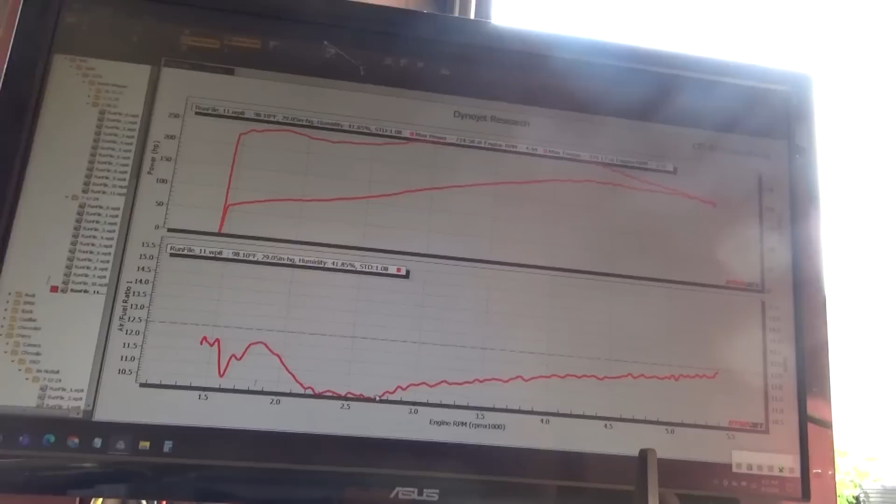Let's reduce our shooter size a little more and see if that raises this bottom guy here. See if a smaller shooter will bring him up. I think it will. And then this is probably going to be power valve delivery enrichment, so we can take some main jet out of the front, and that should raise this up a little bit, I think. Let's see. Actually, taking jet out of it might raise it all the way from here to there and raise it up entirely. We'll see how she works.

So that last run did pretty good. It made 212, 271, which is still not the peak that we've gotten so far, but the peak that we got was a little bit leaner, so I'm actually going to take some jet out of the primaries. It was 67s, I'm going down to 65s. I also decided to try a different power valve, so unfortunately this time the carb's off. We're making 2 changes on the front, but I'm expecting to see that heavy rich after the primary and secondary cycle. It sweeps heavy rich, and then it gradually gets up to about 12 to 1.

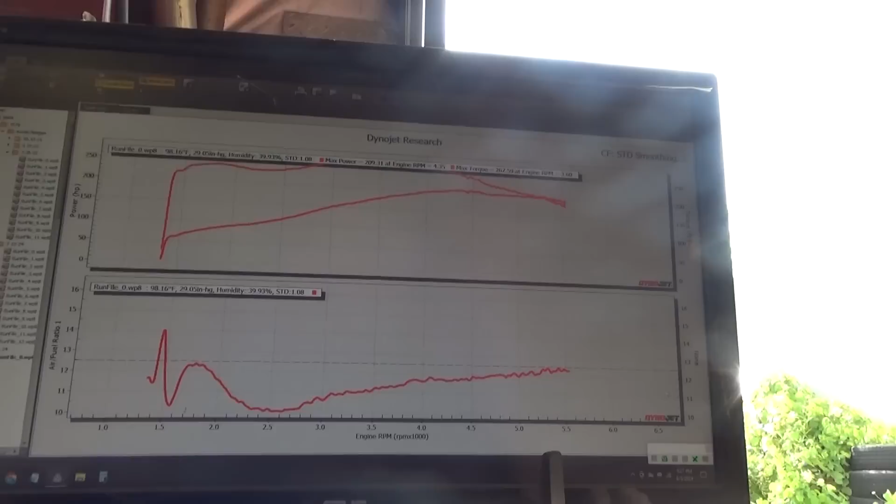Not too bad, not leaking anything. It didn't spit the drive shaft out or anything. Not making enough power to probably do that. 209. I made it worse. This car likes to run fat. 267. Alright. Well, that's our max power today, and it made 224 at 44.6, and we just made 209 at 44.8. So that's pretty wild.

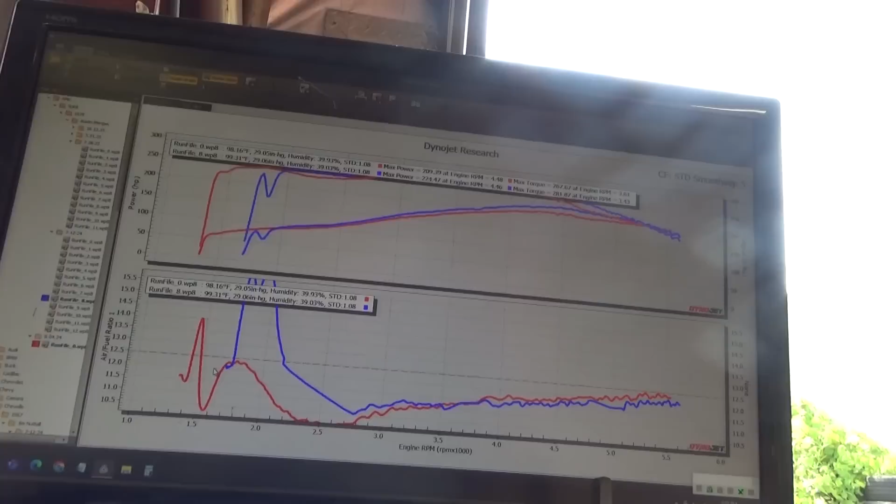This area here should be for power valve, but I haven't quite figured that out yet. But that's where we're going to leave it for today. This carburetor is running very well for what this thing's doing. And we will move on to bigger and better things.

Oh, my lens is dirty. Let's see it. Well, there you go. Some AMC AMX love. We're getting ready to do some other stuff to it too. That'll probably be up on Friday.